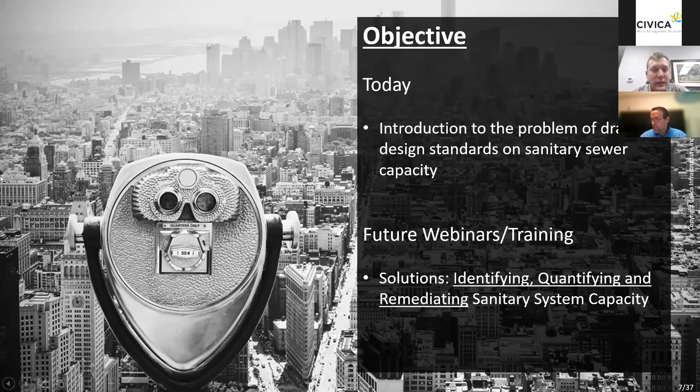There's a lot more I&I getting into the system than what was originally designed for. In this particular case, there's not really an issue—the pipe's not over capacity, there's still room, so it's not causing any problems. But when we do see excess I&I getting into the system, that's when you run into situations where the sewer system becomes over capacity, causing things like flooding in people's basements or spills to the environment. That's really a big trigger for a lot of the work that we do.

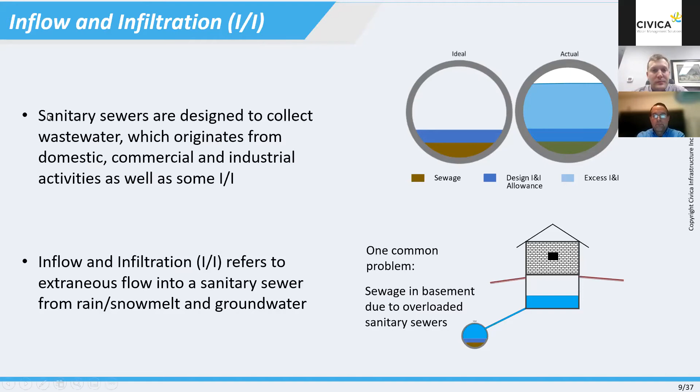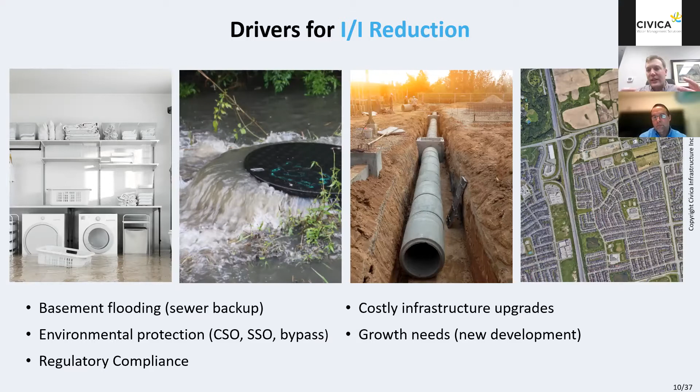When we talk about those drivers, those triggers for I&I reduction, we're really looking at a number of different things, whether that's reducing basement flooding, trying to protect the environment by reducing combined sewer overflows or sanitary sewer overflows, or bypassing at treatment plants. There are some regulatory compliances we're trying to follow in a lot of situations. There's also the other side of trying to upgrade our infrastructure—putting bigger pipes or bigger pumping stations or treatment plants in the ground to accommodate these flows, which are very costly to do. And then there's also the impact of limiting development—if that I&I or wet weather flow getting into the sewer is taking up capacity, it limits the amount of new development you can put into that pipe upstream or downstream. So these are the key drivers we see for doing I&I or wet weather flow reduction.

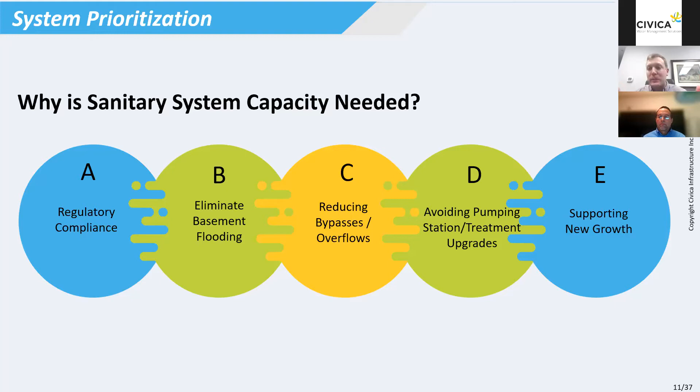So what we wanted to do was poll the audience again and see—these are the drivers of creating and alleviating sanitary system capacity. We wanted to reach out to you and see which one of these is the highest priority for you, knowing they're not necessarily exclusive. A lot of the programs you're working on help alleviate multiple of these issues, but we wanted to see which one was the key driver from where you sit, as part of your priorities in your job. Which one of these is most important to you, from most to least important? Hopefully you can see the poll launched—quickly identify, in order from highest to lowest importance, what's driving I&I or wet weather flow reduction from your standpoint.

Okay, so we'll give a little more time, got to do a little more work on your end, so we'll give a few extra seconds for this one. All right, okay, so we'll probably tie it up right about there.

So basically the top three we'll say are: support new growth is a big one as a top priority. B is another big one, so that would be eliminate basement flooding. And what's the next highest one? Probably A or D—so regulatory compliance or avoiding pumping station and treatment plant upgrades. It's a very interesting, mixed result, but you can see some common ones. The two key common ones are to support growth and eliminate basement flooding, which isn't surprising considering the amount of growth happening in Southern Ontario, but also the fact that we want to reduce and eliminate basement flooding—it's a big driver for a lot of municipalities these days.

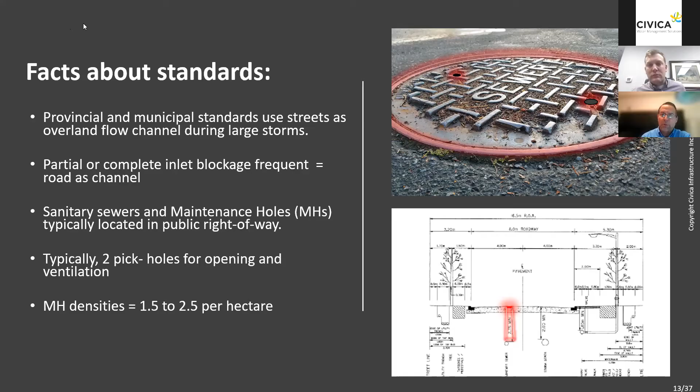How many holes you're allowing water to get into your sanitary sewer systems -- this is provable, this is observable, you can actually measure it, and I will talk about this as well. So there are some questions that we want to answer. We're not going to answer all of them in this webinar. Some of these answers need to be explained in more detail, and we will have some educational classes that we'd like to share with you so we can go into more details. But I'm going to go through the questions.

I think Ed froze. Mariah, am I still good? Can you still hear me? Yeah, you're good. I think he's frozen. Okay, well, I'll start going through, and then hopefully when Ed gets back, he can continue. I think he was having an internet issue earlier, so I will.

Oh, okay, I'm good. All right, so some of the questions we want to answer today, or at least pose today, relate to how I&I occurs in some of the new development areas that we see. What constitutes an I&I defect -- as Ed was mentioning, something like a pick hole was something engineered. It's not something we would typically consider a defect. It's something that's always there and always has been. So that's something we need to answer.

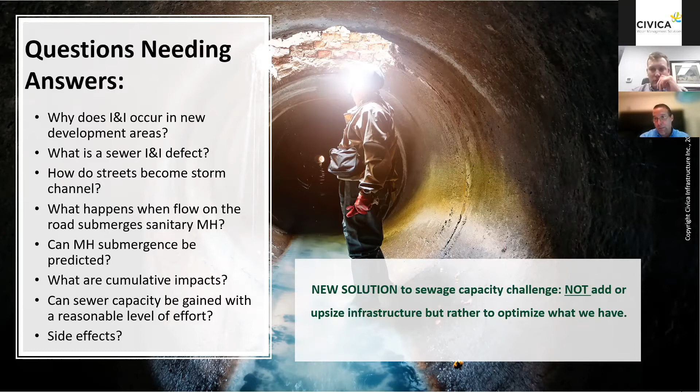So let's go to the next one. I just want to go through the process of how runoff builds on the street. And why is this important? I'll show you this. So there are some terms that I want you to become familiar with. First of all, we have the gutters at the edge of the street, curb and gutter, and then we have the paved portion of the street that we drive on.

There is a highest point on the street called the crown, and from the crown down to the gutter, we have a cross slope, a slope that goes down. We want the water to go to the edge of the street during normal storms and flow down the gutter until it encounters a catch basin, an inlet, a storm inlet. So I'm talking only about storm drainage. So there's a depth of flow on the street at any time when there's a storm.

There's a spread which is measured from the curb towards the center of the road. There's a velocity that affects how much capacity that street has and how much capture occurs at the inlets and the grates. The grates have a capture curve that is characteristic of the shape and size and configuration of the metal grating. And this is more, again, details I want to stay away from at this point. But the important thing is to know how much capture is happening from the surface into the storm sewers and how much is left over at the surface.

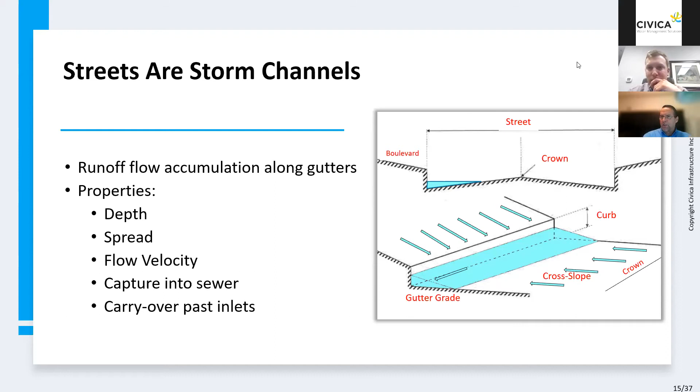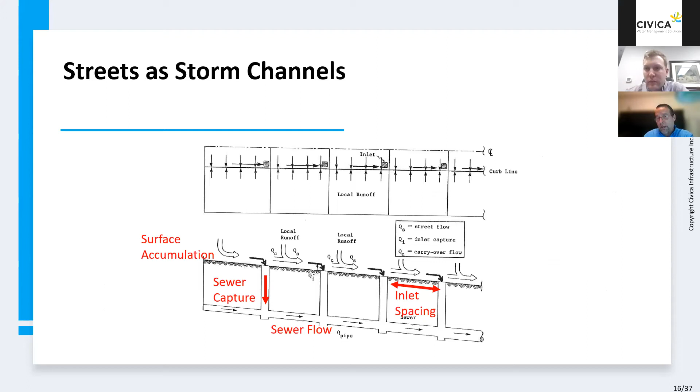So as the storm happens, you have the process where rain falls on the areas, it accumulates into the streets, and we capture some of it into the storm sewer. So we have accumulation at the gutters. The gutters convey the water to the inlets, it goes into the storm sewers, and so on. So we have a cascading effect. Let's go to the next one.

So like I mentioned, different types of inlet grates have different capture characteristics. This is one way that we can improve the blockage problem, is to change the grating and to select one grating that is less susceptible. We may think of making the holes a bit bigger.

I don't know why we haven't thought of this, but maybe somebody loses their wedding ring, and they think it's the end of their lives, but maybe you can find it in the sump. I don't know. I'm just trying to be comical here.

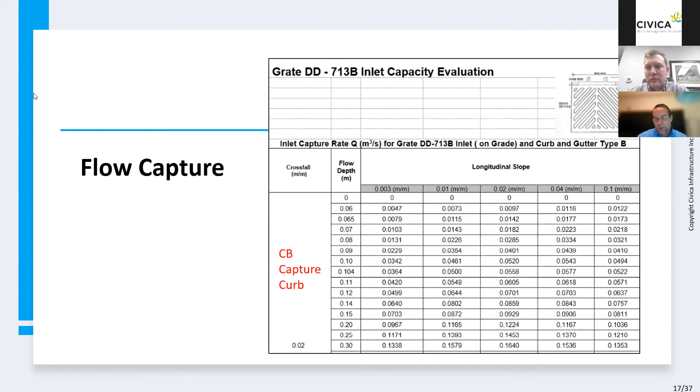In that case, there's only what we call sheet flow, low depth flow. It has a very localized tributary area. If that sanitary manhole is depressed, everything that will reach it will go into the sanitary sewers. If it is fairly new construction, normally the lids and the gratings are at the same level as the surrounding asphalt. So some water will carry over towards the gutter.

So key terms here are, again, we're introducing now sanitary manholes. There's going to be an offset elevation, and that's a key point, that the distance of the sanitary manhole away from the gutter will improve in terms of reducing the amount of submergence and the frequency of submergence. And our current standards already provide for that. They say maximum 1 to 1.5 meters away from the crown of the road. That doesn't always happen. In new subdivisions, sometimes it's hard to accommodate the utilities, and because of bends and utility conflicts, we tend sometimes to push the sanitary manholes closer to the gutters.

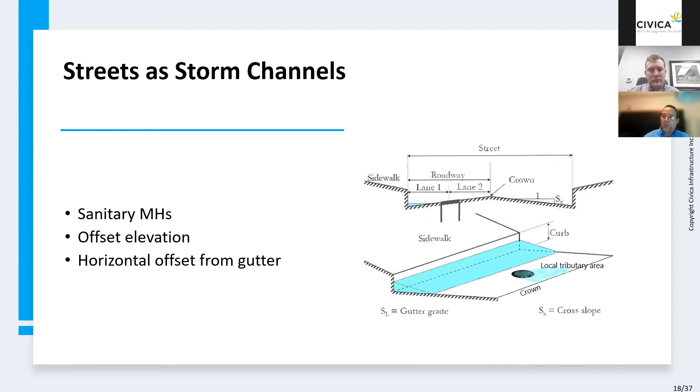But the problem is that some operators are opening several manholes in the vicinity, and for whatever reason, they end up putting these lids in separate sanitary sewer systems as well. And they become like catch basins. They become like storm inlets into the sanitary sewers. Those are definite low-hanging fruits.

Okay, so some of the key elements in a sanitary manhole: there's a frame, which is where the lid sits on. There's a lip that extends away from the edges of the frame where this manhole sits. There's gaps, openings between the frame and the lid that allow inflows to get in. As soon as you have submergence, we see gushing water getting into those. Obviously, the pick holes, which is what we're using as our benchmark, how much inflow do they allow?

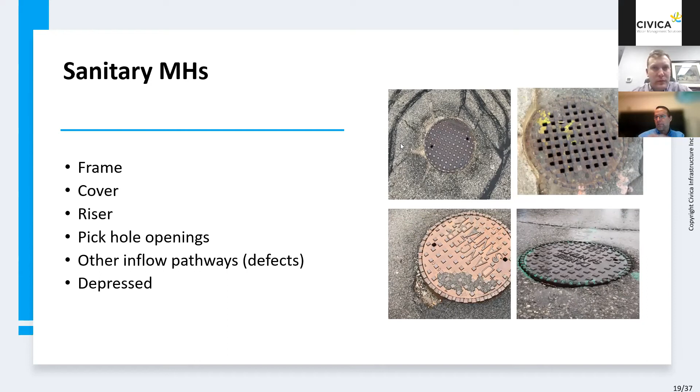So these manholes are key. There's much more to talk about manholes. We live and breathe this stuff, so there's lots of stuff that we can talk about. Let's go to the next slide. Probably have to speed up a little bit, Ed, just to, all right, time check.

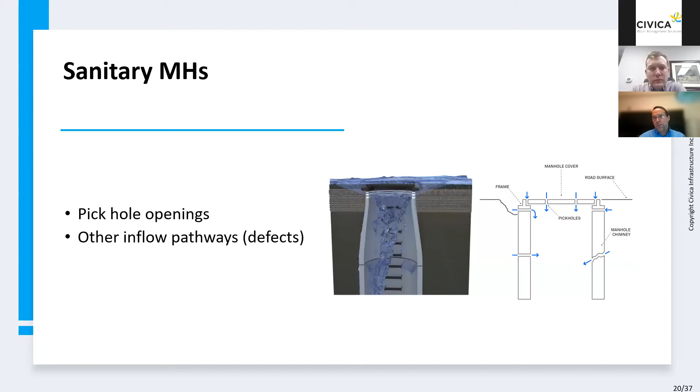Again, so this just shows the pathways. Let's go to the next slide. Pathways that water gets from the surface into the sanitary sewers. This is the condition that we definitely need to avoid: submergence. Sheet flow you cannot avoid. You're still gonna get some sheet flow on top of manholes. Submergence, we cannot avoid it per se. You will have to have some manhole submergence. The question is, what do you do when you have manhole submergence? Do you seal the manhole?

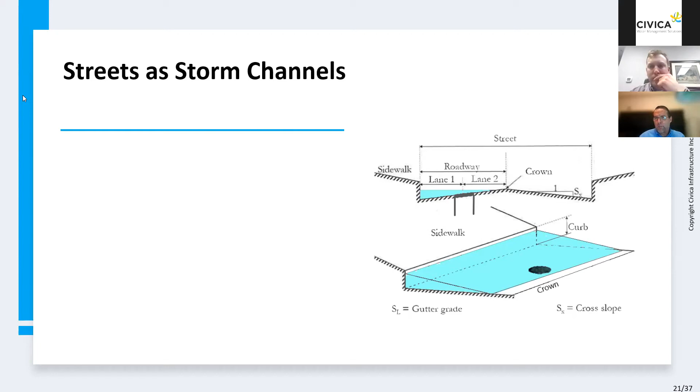That's the obvious solution. But what about when you have consecutive manholes that you're predicting to be submerged? Do you seal them all? So what do you do with the gas? What do you do with maintenance as well? When you seal them, it just takes longer to do. Okay, so it might be one of the prices that we pay. So let's go to the next slide.

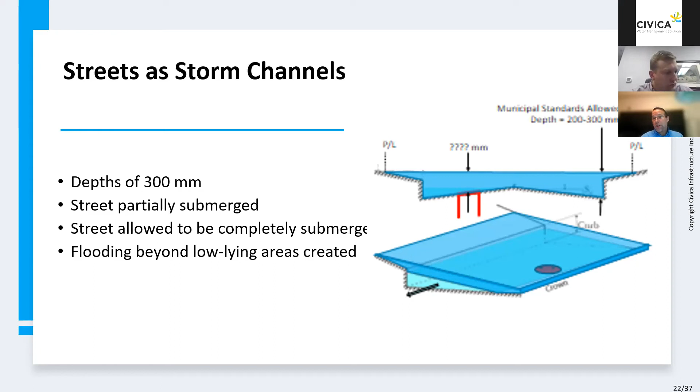So this is, I apologize for the graphic quality. I did this for another presentation just to show the maximum that we can allow on top of a manhole lid if we follow the storm drainage standards for a street. That in some cases we can allow 200 millimeters submergence in a manhole lid. So let's go to the next slide, because I want to show

Okay, this more or less shows the same thing with a standard street cross section. This is a residential typical single 2 lanes. There's 1 lane each way. Residential local street, and this shows a sanitary manhole, 1 meter actually. I'm not sure which municipality. We use many municipalities in Ontario to look at their standards. This is fairly typical. It's 1 meter away from the crown, which is good.

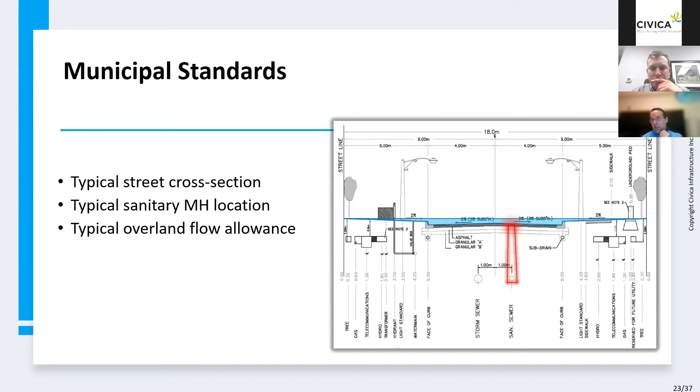We want to have these lids as high as possible. But you can see that if we follow the storm drainage standards, we're going to flood the lids significantly. In this case, it's close to 200 millimeters. It doesn't happen at every location, but it happens enough to create these inflows during large storms, which is what we're designing the sewers for.

So as I mentioned, when we design the sanitary sewers, we're designing them for critical conditions. We don't design them for days like today, where it's cloudy a bit. We don't design them for sunny days. We design them for a maximum of inflows that should be happening during a critical storm, large storm, 100-year storm. The system should be able to handle the inflows.

So do we do that? That's the question. So for road drainage, the flow needs to remain in the right of way. We cannot allow the water to go into the private property. We cannot allow the water to go over reverse slope driveways, which I don't think are typically allowed nowadays, but they are present all over the place because there are legacies, and some municipalities may still allow them. And if you do, you have to create a high point on the sidewalk or in the driveway to prevent water from the road getting to the basement.

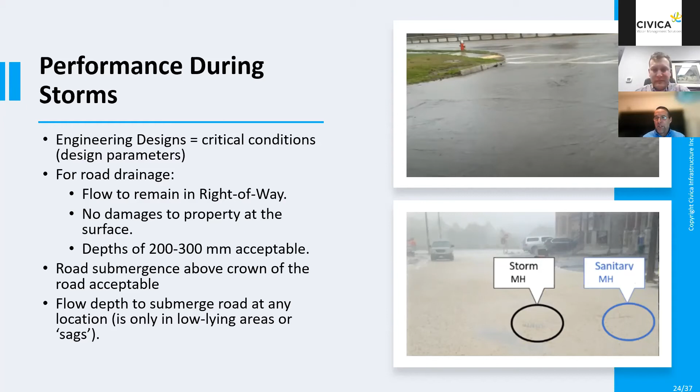Typically, a lot of operations engineers think of sags, road sags, and yes, sags are typically vulnerable. You see them flooding all the time because inlets become blocked, and you get residual water, or the storm sewer is backing up and water will not drain. I have videos of residents kicking catch basins, raking catch basins, and you can find them on YouTube, all kinds of videos of people just trying to clear the blockages. Let's go to the next slide.

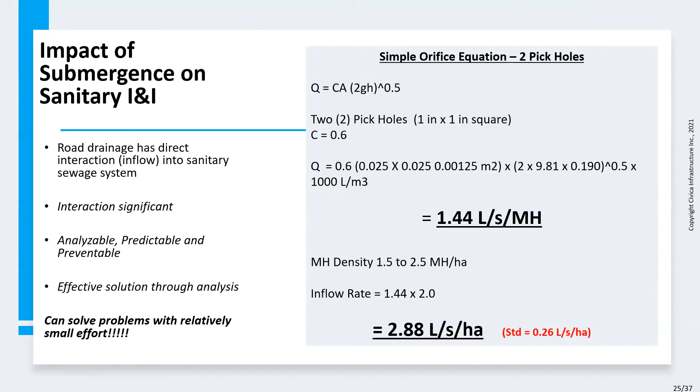Okay, so I want to put some numbers. I want to put some meat on these bones now. So what happens when we allow the road to operate as per the road drainage design? What happens to the sanitary? In simple terms, I'm using the orifice equation. If you're a civil or environmental engineer and you've taken some of the hydraulics courses, you may be familiar with the orifice equation, which is the basic equation of how much flow gets through a hole if there's a certain amount of water sitting on top or on the side. It could be a side hole or horizontal. In our case, these are the pick holes.

I just did the pick holes. I did not account for any other inflow due to cracks, due to gaps between the lids and the frames, none of that. I can tell you that on average, the actual inflow is about twice as much as what happens through pick holes. But I don't want to muddy the water, so to speak. I just want to use the pick holes.

So these calculations show you that if we allow the maximum extent of flooding in the local street that I was just showing, which is typical, sometimes higher in some municipalities, sometimes a little lower, but very close, this is the type of inflow we're going to get through 2 pick holes: 1.44 liters per second per manhole. Well, you may say it's only 1.44 liters per second. The pipes, at least the 200, 250 millimeter pipes, are usually 40, 50, 60, 70, depending on the slope and the material. They have much more capacity than 1.44. Yeah, but that's just one manhole. There's no cumulative effects. There's no other defects. There's no dry weather flow. This is just one.

So what does that mean in terms of the design standard? We can convert these 1.44 liters per second per manhole into liters per second per hectare as soon as we introduce the density of manholes present in an urban area. Very simple. With Google Maps, you can count the number of manholes, come up with an area, and come up with a density. We have much more than that; we have GIS. So we come up with typical ranges of between 1.5 and 2.5 manholes per hectare. If you multiply the maximum times the density, you get 2.88 liters per second per hectare.

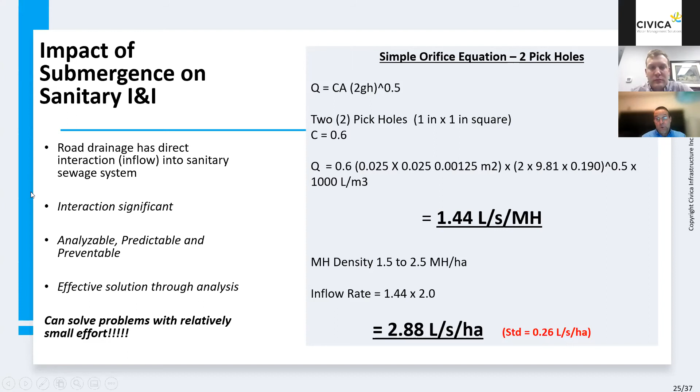We need to start sealing and doing strategic sealing. We have to do venting and measuring before and after to show solutions, problem solved in many areas. Let's go to the next slide.

So we got about 5-10 minutes, Ed. Just as all right, okay, good.

So this slide basically summarizes some of the variables that affect sanitary sewer submergence, because that's what we have to do. We don't have to go identify every manhole, that's easy to do, sanitary manhole. What we have to identify is the manholes that are vulnerable to submergence.

We did a pilot already in York region. In the pilot area, we selected a typical Southern Ontario subdivision, it was 20, 25 years old, so it's relatively new, and it's measuring a lot of I&I. York region has been breaking their heads over why is this area responding. It was developed in Southern Newmarket, very new, relatively new, 20, 25 years, and they're measuring all this I&I in the system. So they're thinking there's supposed to be all kinds of defects, but they haven't accounted for these manhole inflows.

So we did the pilot area analysis and we found that 10% of the manholes are the ones most susceptible to submergence. Doesn't mean there aren't more, but the ones that will give you the biggest bang for the buck are about 10% in our pilot area. In your particular case it might be 15%, but out of 50 manholes, only 5 during the 100-year, 4 during the 5-year storm return periods, we're recommending to seal, and we're going to be sealing them this coming spring.

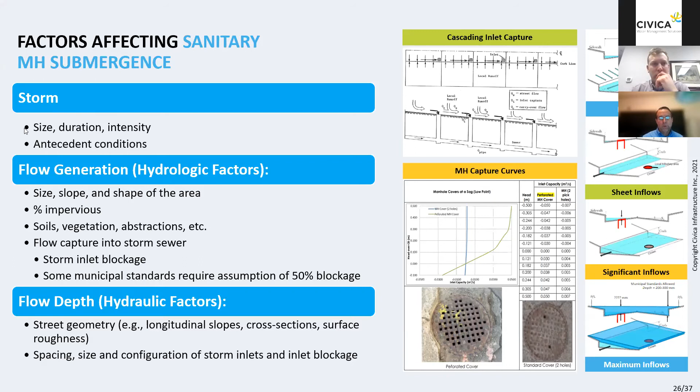Okay, let's go to the next one. I don't want to go through all these details because of time. Again, I mentioned about blockage, inlet blockage. In the pilot area I've been visiting this site every week, pretty much. I have photos of the same catch basins, and you won't believe it - and I'm not saying this is any reflection on operations, you cannot avoid this unless you actually go there every week and clear the grates. What we need to do is see how we can improve the grading, maybe doubling catch basins when you don't really need them. So I want to move on to the next.

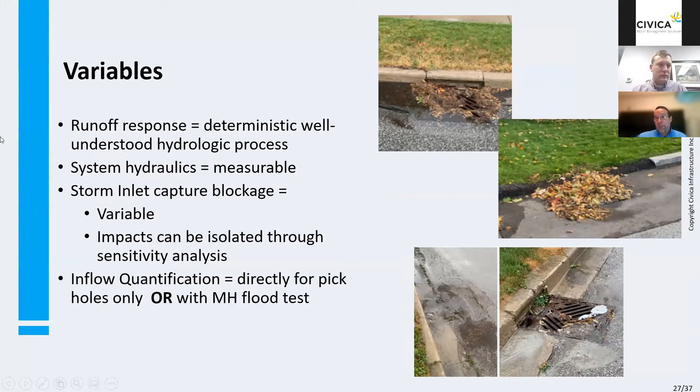Okay, so whenever you're doing this for land development purposes, so you have a developer that needs capacity in the system - we're doing this already in big areas in Newmarket - you need to demonstrate reductions in flow so that you can give, what we call it, the 2-to-1 ratio. Reduce two times the amount of inflow that's happening in one area, and you give 1 unit of capacity to the developer. They pay for it. They're more than happy to pay for it because doing this is way less costly than upgrading pipes, pumping stations, treatment plants, and the time it takes to do all that.

You need to do this also to improve the treatment. Diluting water in the sanitary sewers during large storms shocks - it's not good for the bacteria in your treatment plants. And not to mention the bypasses that you're likely causing through all this inflow. These are low-lying fruits to pick. Let's go to the next.

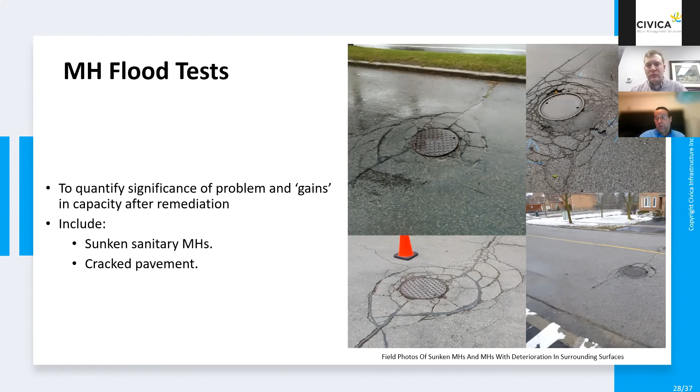Oh, so sorry, so I'm going to continue on the manhole flood test. Sorry, I have a couple more slides here. So these are some of our staff, we have several crews that can do this. We do it basically to quantify so that we can convert capacity reductions in a sewer by improving your municipal infrastructure, in exchange for half the flow from new development.

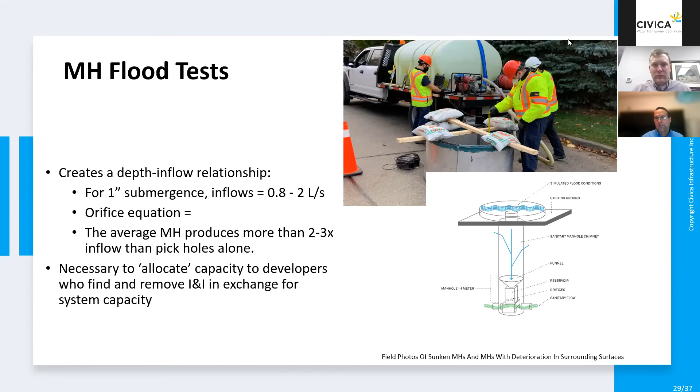And that's new development without the I&I that is typically caused by this type of problem as well, because new construction should follow practices that avoid this type of inflow. So in some areas, we use a 3-to-1 ratio — you reduce the flow 3 times for 1 unit of capacity. Matt Malone has actually been running some of these developer-led I&I programs, and he can talk to you more if you have any questions.

Again, this just shows the impacts of the standards in several municipalities in Southern Ontario. We don't want to name them, but listen, we're all in the same boat — all municipalities have this issue.

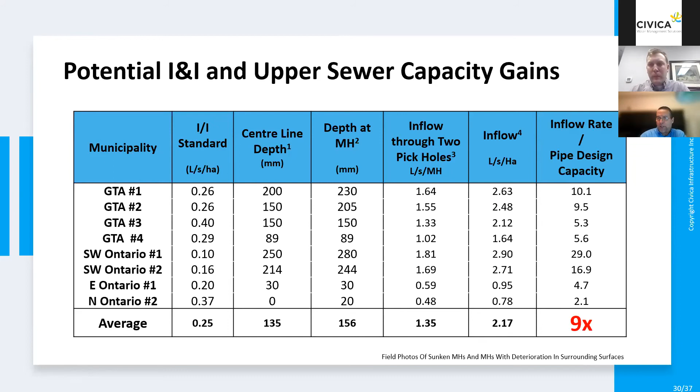We hadn't found this connection until now between the storm and sanitary, the impact due to just pick holes. And this is not just in SAG areas or obvious low-lying locations where the sanitary is in the flow path in a ditch or on the gutter. These are manholes that seem to be okay — they just become submerged because the storm drainage, which is a relatively complex process due to imperviousness, spacing of catchbasins, and blockage, is hard to predict. But we have an analysis approach called an enhanced dual drainage analysis that we will train you on if you're interested, in a class setting. Okay, let's go to the next slide.

Okay, so you can convert these to volumes as well, so it's quantifiable. You can justify it, and say to a developer: you do this, we're only going to give you a third or a quarter of this capacity, but you have to go do the work, pay for the work, get the work done, and demonstrate it to me. I'm the owner as a municipality — I need to see the reductions.

Flow monitor it as well. The problem with flow monitoring is that to demonstrate it, you need to have the flow meters in longer, because you have to capture it during large storm events. So this has to happen at least a couple of times before and after, or at least once before and once after, to see a marked reduction. I'll submit to you that you will see a reduction by sealing manholes pretty much right away, even during average storms, because of blockage factors as well. Let's go to the next slide.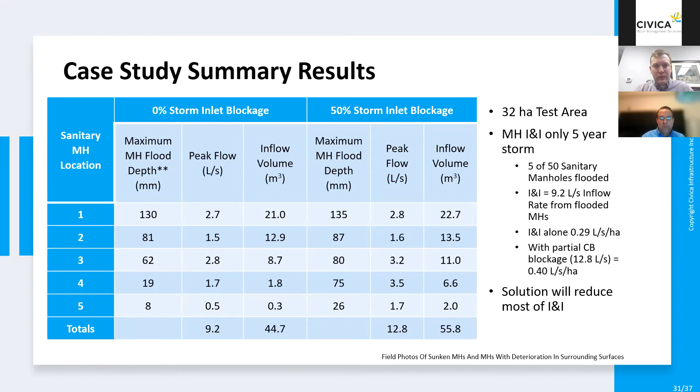Now, this is the type of data Ed was talking about when performing some of this analysis, when you want to identify some of these flood susceptible locations. So just a question to the audience: do you have some of this data in-house, and how comfortable and accurate are you in using that data to identify these locations? If you don't work for a municipality, this may not be totally applicable, but do you have this information available so you can perform these analyses to find some of these flood susceptible locations?

So it looks like most people have the asset data when it comes to pipes, maintenance holes, and catch basins. A lot have GIS data. Not so many are sure on the LiDAR side of things, or the ortho photos. So it looks like at least that asset data is there, which is a good starting point. And a lot of municipalities we're working with are either acquiring LiDAR data or have the ability to acquire it. So that's good feedback.

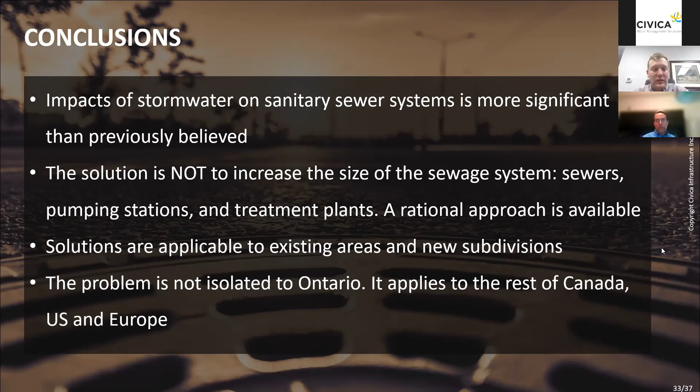It's not finger pointing. We want to bring it to light, and it applies not just to Ontario, but Canada, the US, Europe, wherever standards allow the streets to essentially act as river channels, as Ed mentioned.

So what's next? Ed's been working with the MECP to update the provincial drainage standards, at least for new developments. It's going to be tough to go back and fix a lot of it for older areas, but the guidelines and standards should be updated.

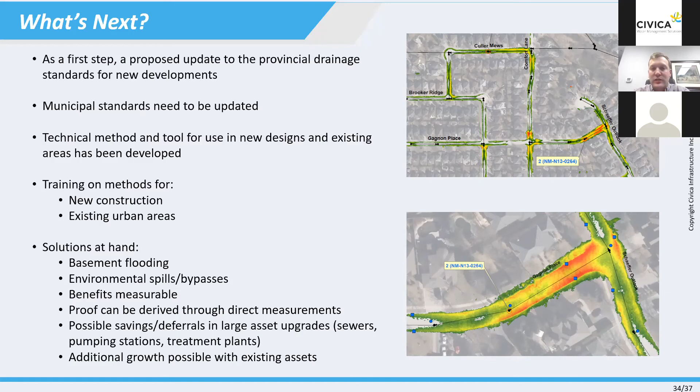We are developing tools - a bit of a teaser for upcoming webinars - to identify locations where maintenance holes may be susceptible to flooding, doing manhole flood tests and quantifying how much is getting into the system. We have training and webinars available, so feel free to reach out and we can facilitate that for you or anyone interested, along with a number of solutions that may be applied.

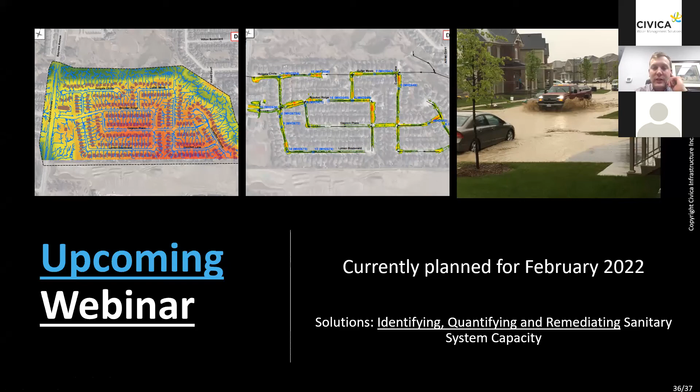There was a question just around - and Ed, I know we've run into these a few times before - the rain dishes or inflow dishes that some municipalities have put into sanitary manholes to help alleviate some of these issues. I've seen situations where they're removed, or somebody smashed them down into the maintenance hole, so there's a bit of an operational concern with using those inflow dishes. In my experience they have worked effectively in some locations, but there are other options, and we can talk about that next time as well, as to what some of the options may be when it comes to sealing or mitigating these flows.

I don't know if you want to add any more on that as well. Or if you froze. Yeah, I think you might have froze.

So there's another question: sanitary manhole lids that are closed type - is inflow an issue with those? I guess it depends on what you mean by closed types. There are some that have no pick holes, or they have hooks, or maybe very few openings that water can get through. It depends, as Ed was mentioning, that we've identified through some of the testing that the gap between the cover and the frame, if it's not fully sealed, if it's not one of the maintenance holes cranked down with a gasket, water can still get through between the frame and the cover.